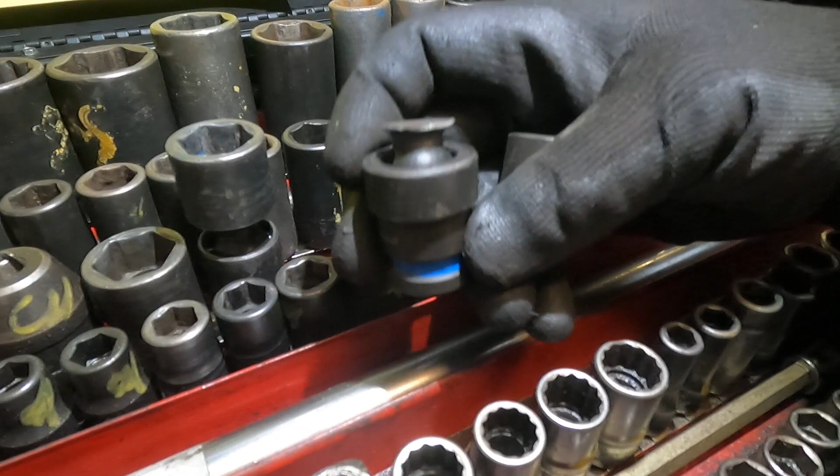This is one of those weeks where things have started to go wrong and you just have to muddle along. It's broke. Yeah, it's a cheap eBay swivel socket which was really thin, didn't realise, hasn't had very many working hours, and it's broken, and that was an eBay purchase. This one's a snap-on one, which I lost the other one, 80 quid compared to 20 quid. Big difference. It's just one of those things, isn't it? Well, we'll stick a welder on that and see how we get on with it. If not, we'll have to go back to snap-on.

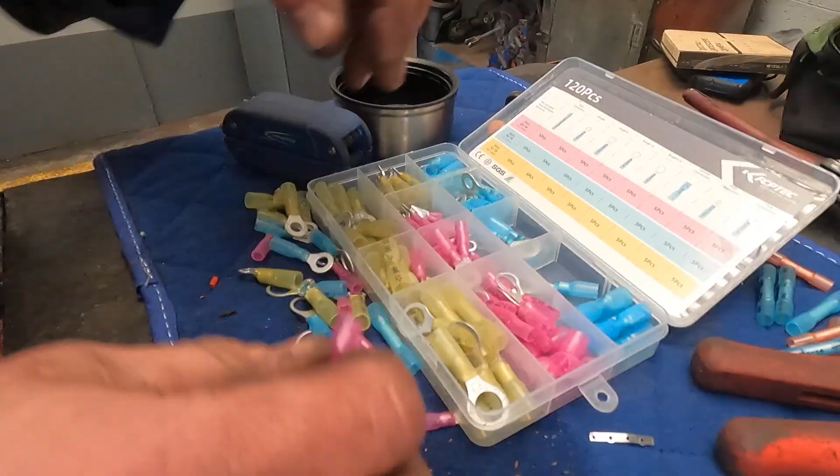Yeah, it didn't help too much, really. Things just didn't seem to work out. This blowtorch seems to just not work at the right time for doing heat shrinks. And talking of heat shrinks, you ever opened a box full of heat shrinks and they all fall out everywhere, and then you've got to find a way of packing them all back in? Yeah, that's just one of those days.

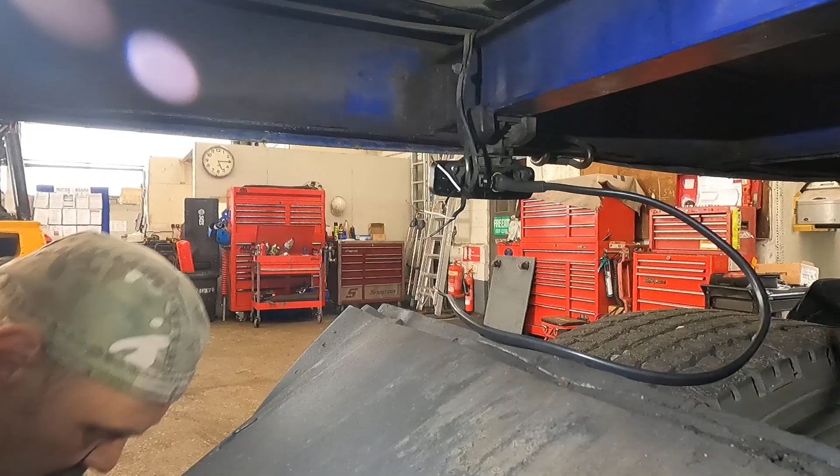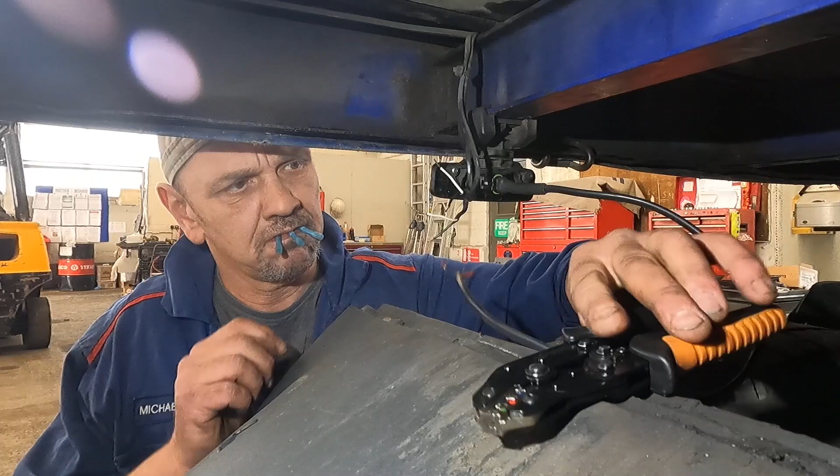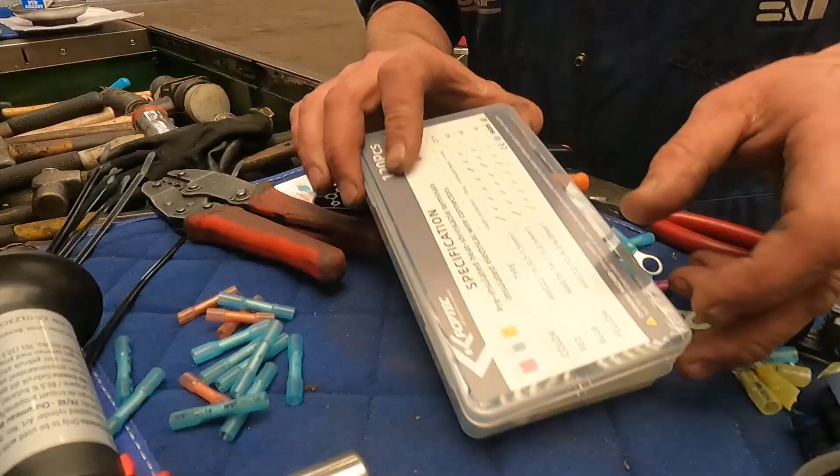And the AWG fittings that I've got here, pink, blue and yellow. Yeah, it's the usual stuff, but these ones are shrinky dinks, aren't they? And they do work if you heat them up properly and crimp them properly.

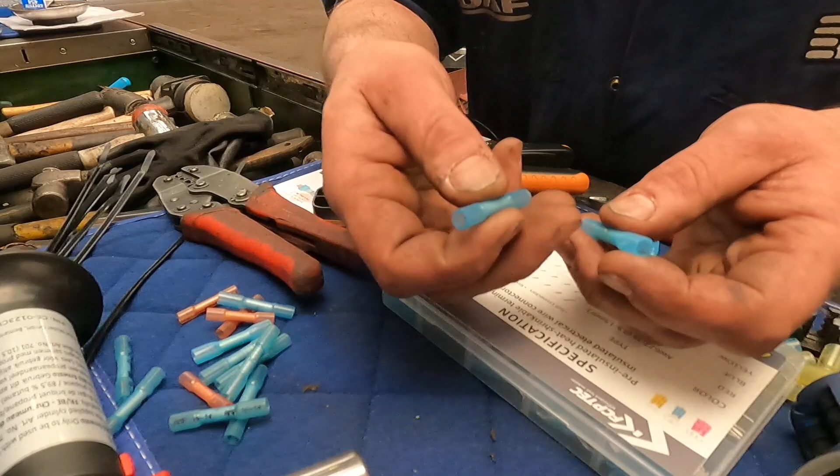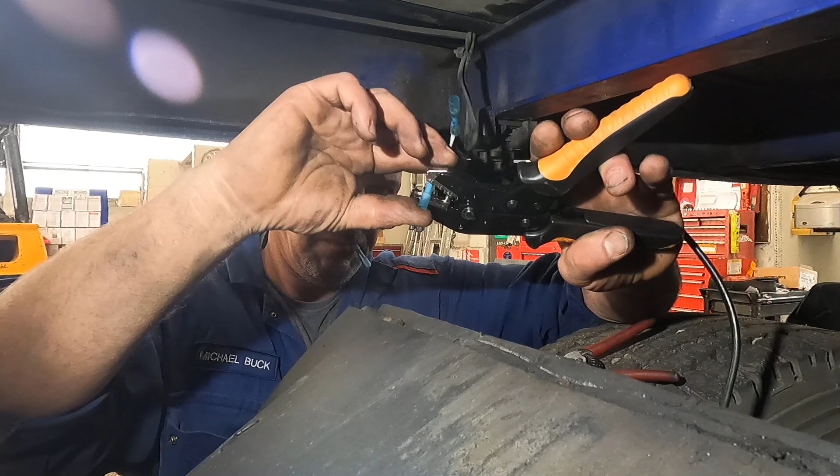So the crimper is also on the storefront, and I'm not going to tell you how good it is yet, but this is going to go in my breakdown box, and I will give you a review of it once I've done a few jobs, electrical jobs, because I can't show you the same thing all the time, as generally what I do is a lot of side marker wiring. But yeah, heat shrinks is the way to repair stuff, or to put stuff in line, or for connectors for batteries and all sorts of terminals. So basically this is the correct crimper for the terminals, whereas I've been using something different which wasn't quite right.

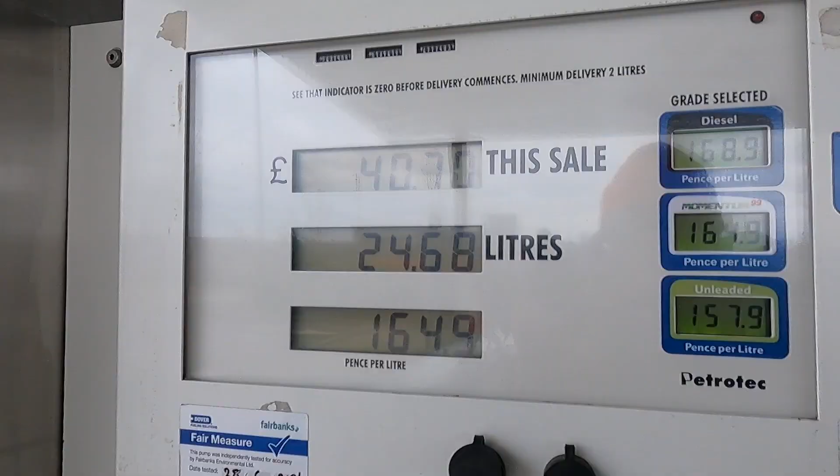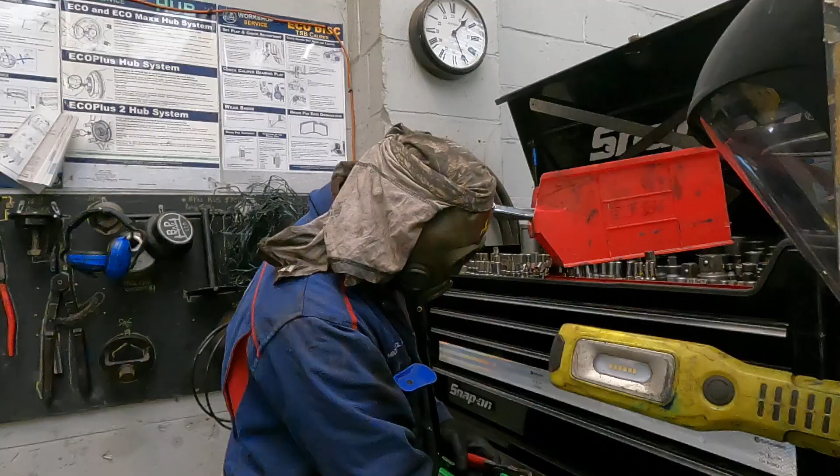Don't know about you guys, I don't know what you think about the fuel prices and the fuel shortages. Yeah, we are going through a crisis again, aren't we? And it's just ramping up. And look at this, sorry, no diesel, no unleaded. It's getting more and more common. Perhaps a guy could tell you all about that. He watches global affairs, he's clued in on what's happening.

But anyway, when he started with us, he looked at this tool and said, 'Oh, what is this? I don't understand this, it has a hook. Is this for a weapon? Maybe you can hurt somebody with this. I don't understand, it's weak, but it's interesting. What do you do with this? Ice pick, maybe? Yeah, I don't know. I'll put it back in the box.' That's what he said.

Yeah, well this is what it is. It's a seal puller. I'm sure some of you guys sussed it straight away, but if you can get underneath the seal in a hard place, which sometimes they're not, because this Isuzu D-Max seal is a little bit awkward and tough in there, that's what it's for - pulling seals.

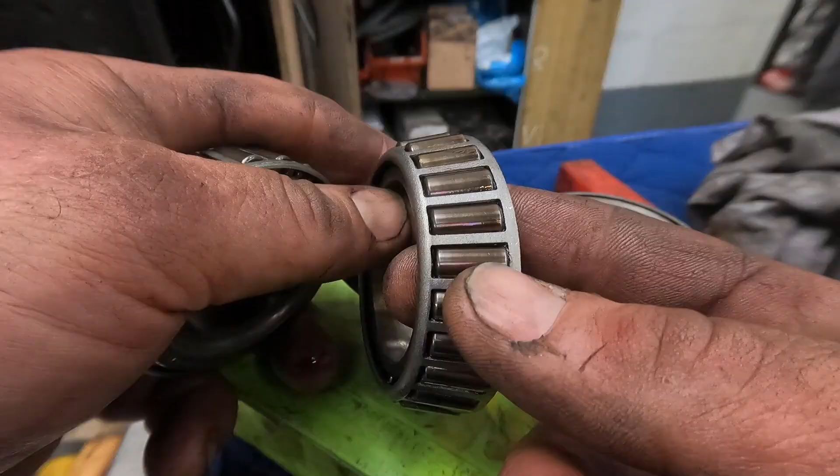Okay, and I don't often do this now. I used to on Land Rovers, and that's about it really. There aren't many vehicles actually where you get fully floating bearings, but that's just one of these things. That's a fully floating bearing, and these bearings have been overheated, as you can see by the bluing, the discolouring on the surface there. They've been a little bit too hot. Okay, they should look a little bit better, but that's just the way it is. It's about 80,000 miles, something like that, so they need a change. 4x4s are high maintenance. Yep, so you can see the discoloration there.

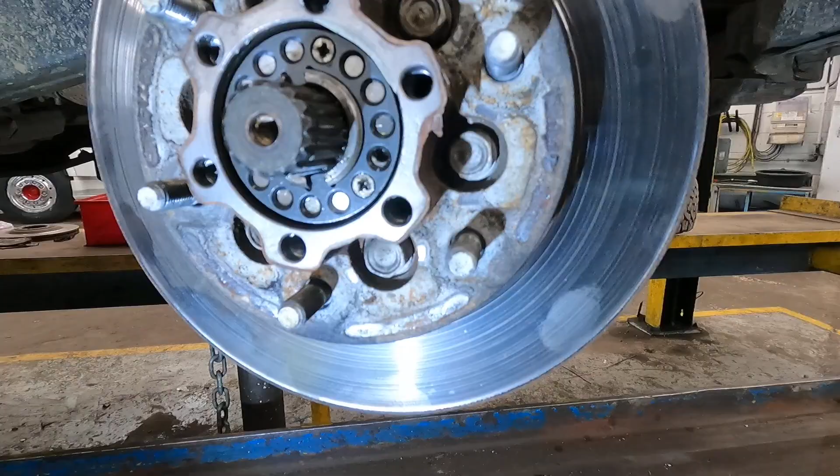That is not good. Now the Isuzu setup, this is interesting because it's 3 screws on there, and I had to do a disc change and wheel bearing change on the front of this. So yeah, this is quite interesting. And this was one drilling out the screws because they wouldn't come undone with a screwdriver, and when I put a screwdriver in, they just screwed up the thread.

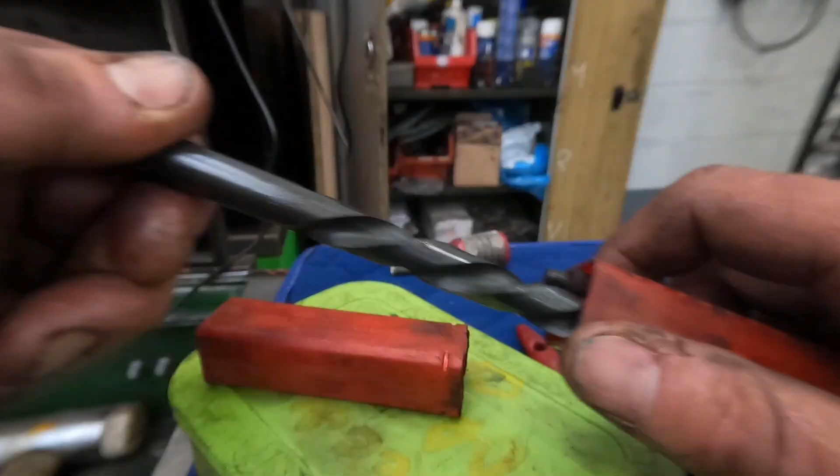Here we go, a left-hand drill bit which turns the way a screw undoes. You can see the action there - it takes the screws out. That's one way of getting them out. The other way is to chisel them out, which is a bit brutish, isn't it? But you can see all 3 screws out, no problem.

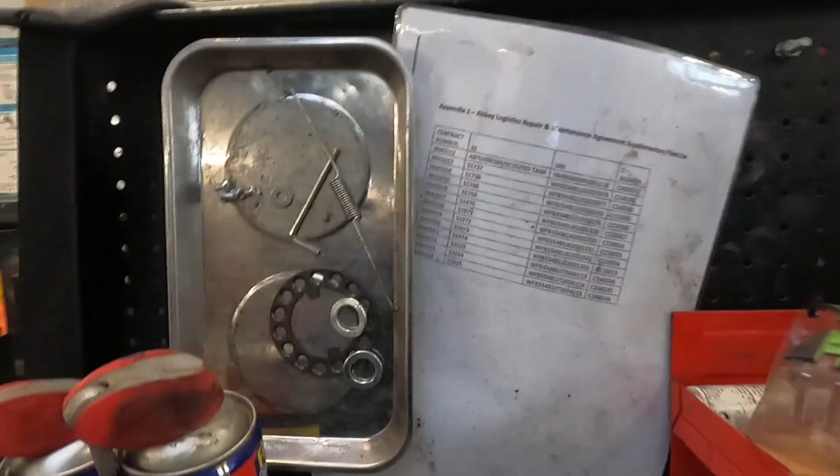You always have spares when you order your discs - get the screws and an extra locking plate as well.

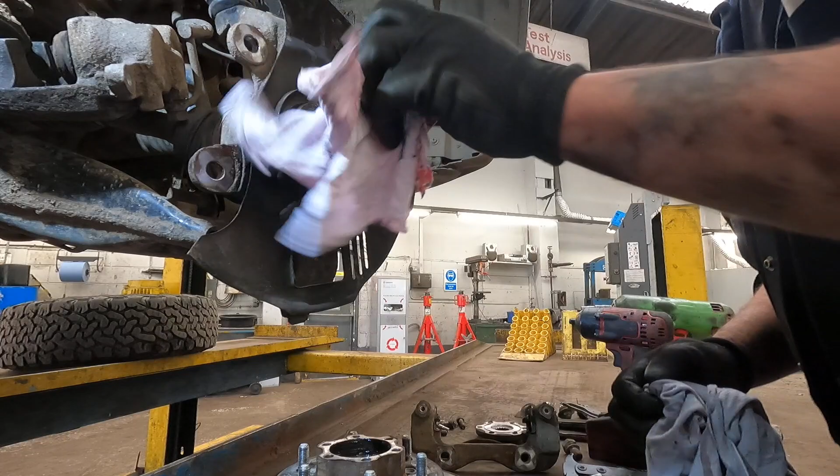The hub nut is a bit weird on these Isuzus. It's the first time I've actually stripped one down, believe it or not. Even though we've serviced a lot of these in the past, they never seem to go wrong. But apparently on the A service, you're supposed to take them out and re-grease the bearings, which is a job in itself because you've got to take the caliper off.

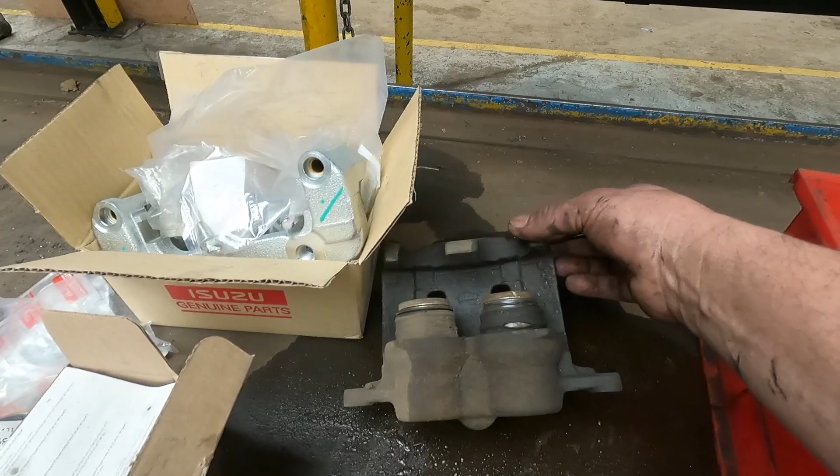It came in originally with a complaint of no brakes. Yeah, no wonder, no pad. The pistons came out completely, popped out and it was leaking. So that was recovered in.

What we've had to do is discs, a new caliper on one side, and I want to show you this tool that I've got here, which is a clamp. You like this, don't you?

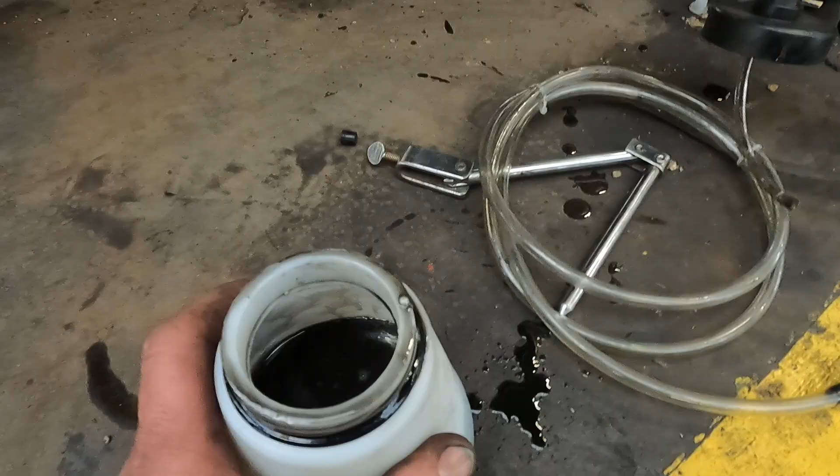It's a brake hose clamp. As you can see here, this is what it looks like for clamping off hoses, so you don't lose any more fluid when you're doing work on your brakes.

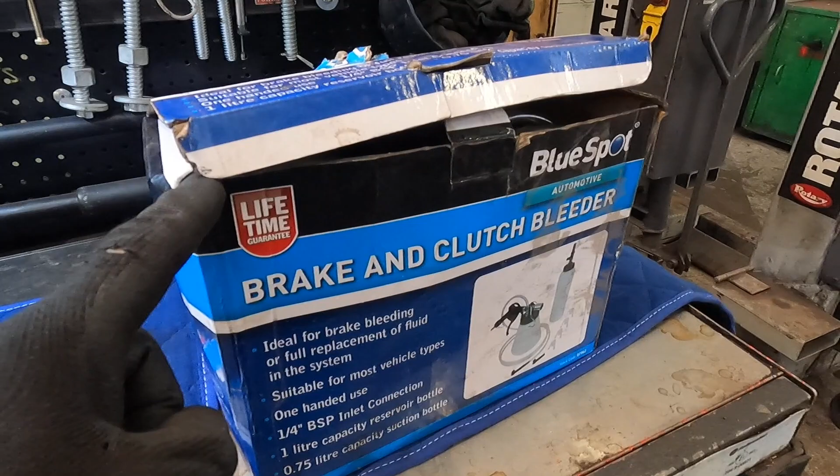But you need to bleed, so I have a brake and clutch bleeder, which is BlueSpot - our favourite tool company, which is cheap and cheerful. This is for bleeding brakes or even doing clutch systems.

You get instructions here, and there's not much to it, to be honest with you, but you do need an air supply, so it's a workshop piece of equipment.

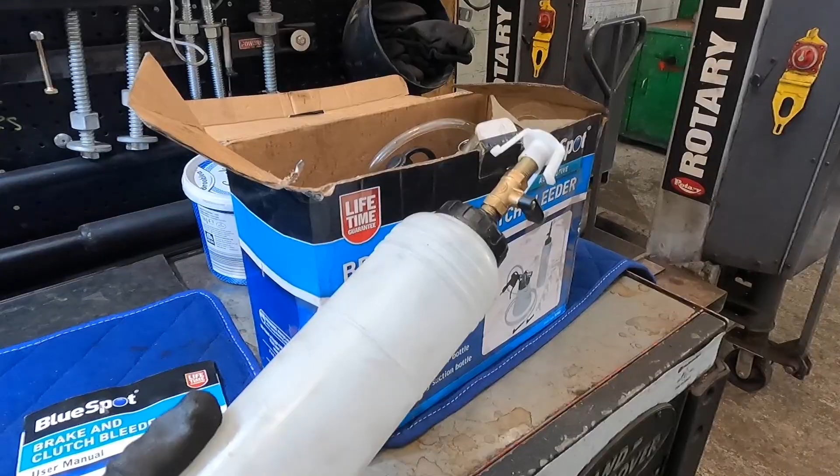This is a reservoir top-up, so instead of having to run around and top up the reservoir, unfortunately the Isuzu one's too wide, but there are adapters to have it stand up on your master cylinder. We'll have to resort to the old way of keep running back to it and topping it up. This is unusual actually, because the neck on an Isuzu is a lot wider than most vehicles.

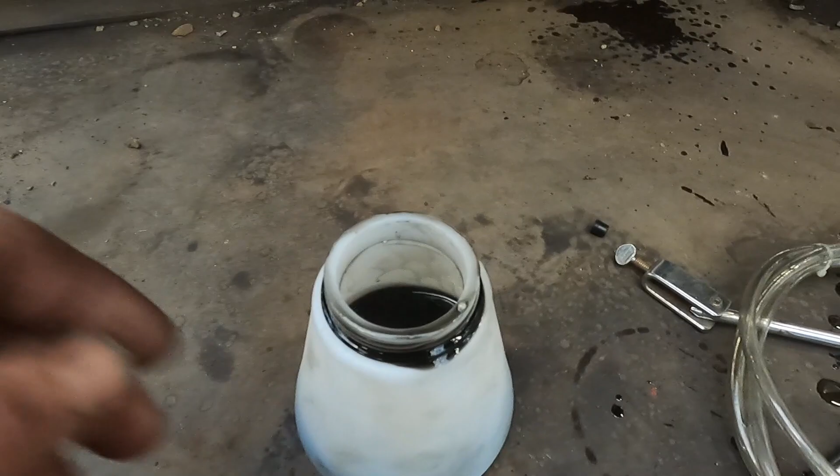You want to be bleeding brakes every 2 years or so. You don't want to get them to that colour - when the fluid's that colour, there's corrosion in the system, isn't there?

Basically you fit an adapter onto the nipple, crack it off, crack it off - get it? You crack off the nipple.

Then you just pull the trigger once it's connected to an airline, and what happens is it's literally a bit like a spray gun really. It just has a gentle vacuum which will bleed the brakes up, but that will pull the fluid through the system. It does take time.

It's not one of those super duper 'let's do it in 2 seconds' tools. This does take time, and you see it's not a full flow here, which first when I used it I thought wasn't right, but it is right actually.

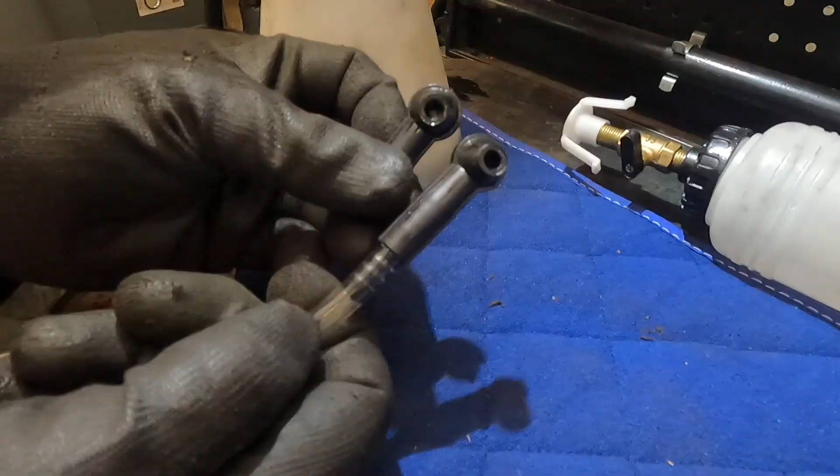The adapters you get here, you get 2 different types - you get the right one for your bleed nipple, and as that's pulling it through, this has been used quite a lot actually. We've been running it in the workshop and found it's really good.

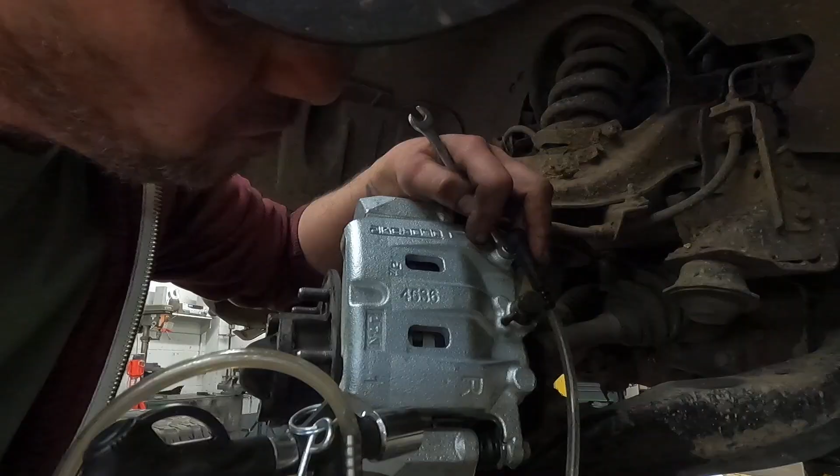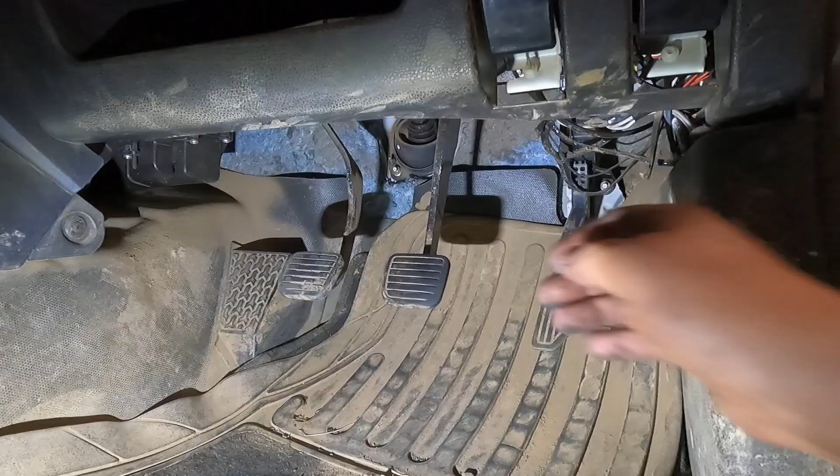So it is basically simple. I've given it a good road test and I'll say yeah, this works quite well, simply because I can get a pedal - that had no pedal when it came in. It does have a solid pedal now, so I've bled up the fronts.

That works, and of course to get the level on the reservoir right, you can also use it that way. So it is for workshop use really.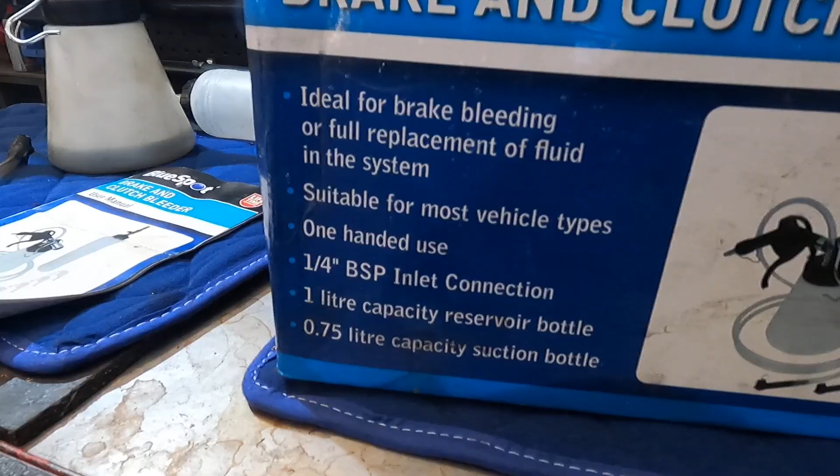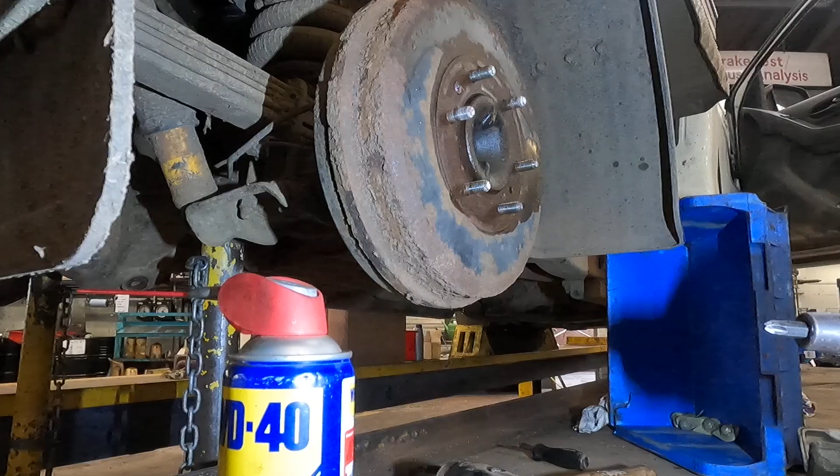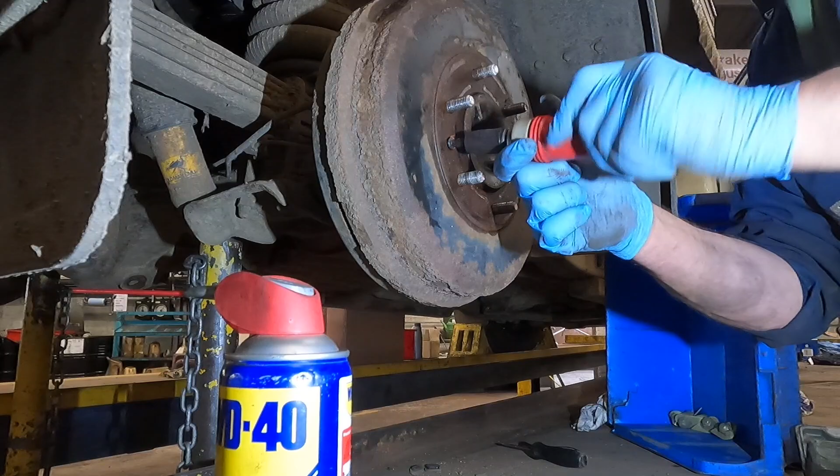Now, rear brakes - had to take the drums off, change the shoes, screws. They never come undone unless you use something like an impact driver. You whack it, it turns just a little bit, it jars the screw threads to come undone. So this is a story within itself - brake drums, removing those.

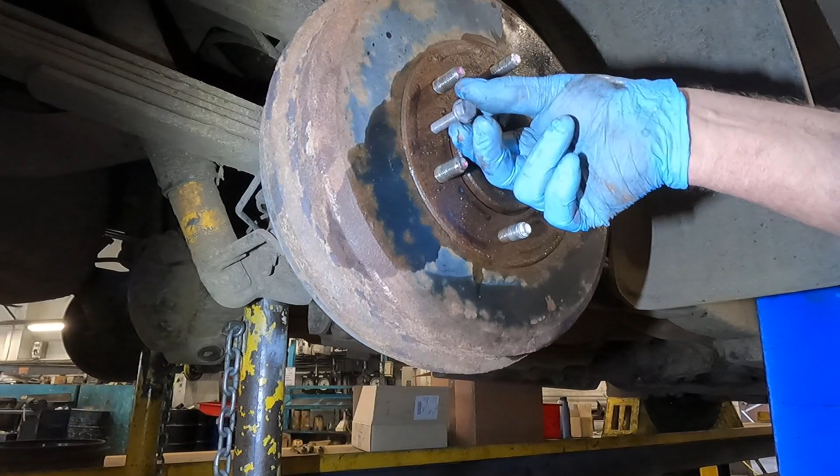Now, HGVs, the drums have a threaded hole on both sides, so what you can do is put a bolt or two bolts in and then wind them out. This will pull the drum off the hub, but this one had a hole - didn't know what the thread was.

Turned out it wasn't a thread at all, there was no thread in there. So what I have to do is resort to a bit of banging, and you can see the amount of dust coming off this.

Well, this was only half the story. Now, remember I did a review on the Teslong - this has turned into a station bike, this endoscope. Yep, Teslong endoscope, which is absolutely brilliant for sticking in places to see things.

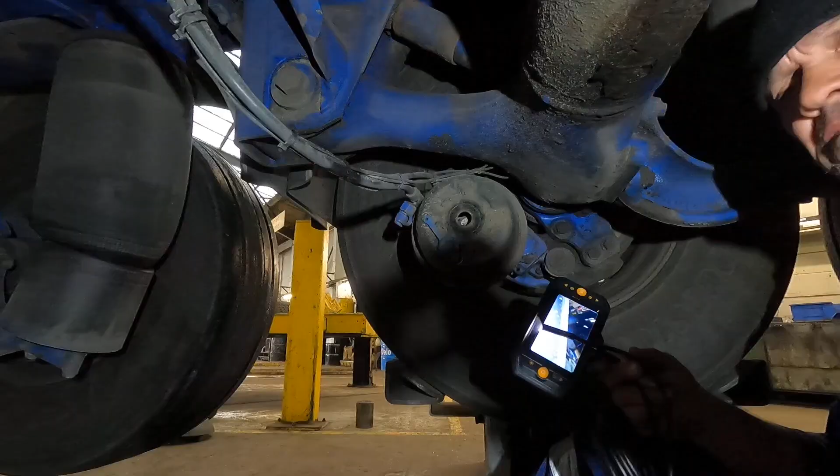Now Teslong have asked me to review a new one. Pete delivered this from Van 73 very, very quickly. I will do a review on this, but it's not actually a borescope, it's a broescope - like bro science, bro. It's a broescope camera. Actually, it's a mini one, which is all-inclusive - there isn't a detachable lead on this.

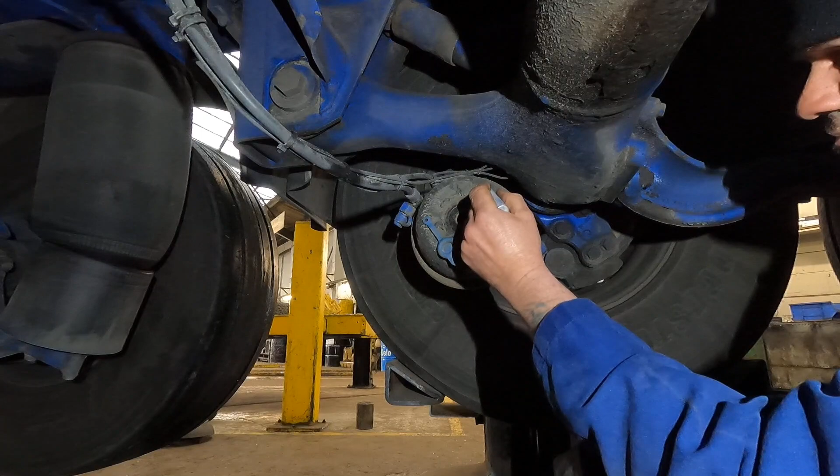As you know, I do brake chamber checks because it's a pain in the backside when we do a loaded brake test for MOT before we send it to test. So I look for broken springs - lots of uses with an endoscope. It has become a vital piece of equipment, and as I said, the station bike means it's something everybody uses. So yeah, that's a failed brake chamber. Done that pre-MOT inspection, and this means I don't have to change them on the lane.

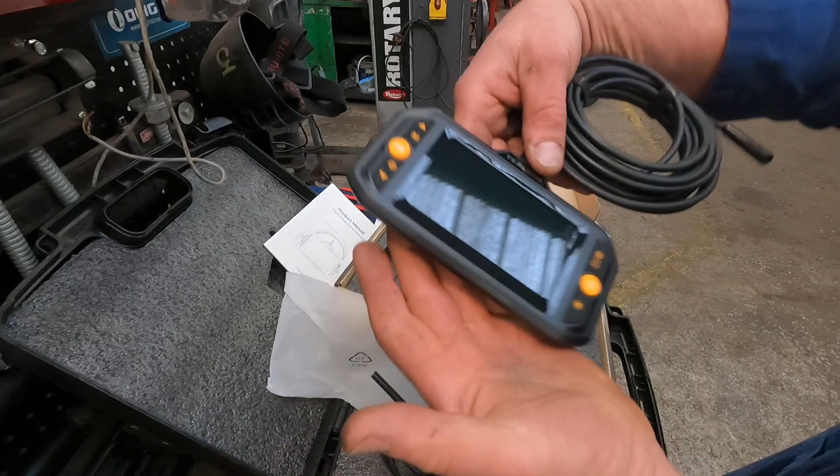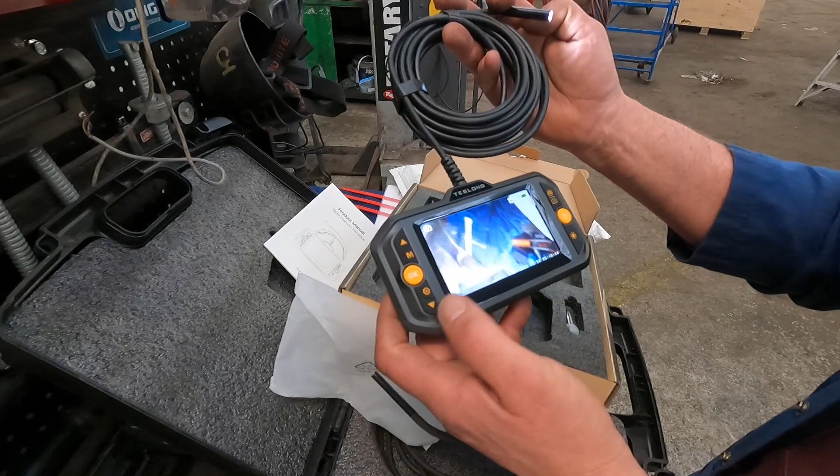Okay, so yeah, done, finished. I will do a review. This is nice. As you know, we don't read the instructions - what we do is just mess around with them, press the buttons and see how they go. So I'll show you the uses of this later. This is a nice bit of equipment. I've recently had a lot of kit sent to me, a lot of emails - don't know why, I think it's just one of those seasonal things. So it's not bad at all.

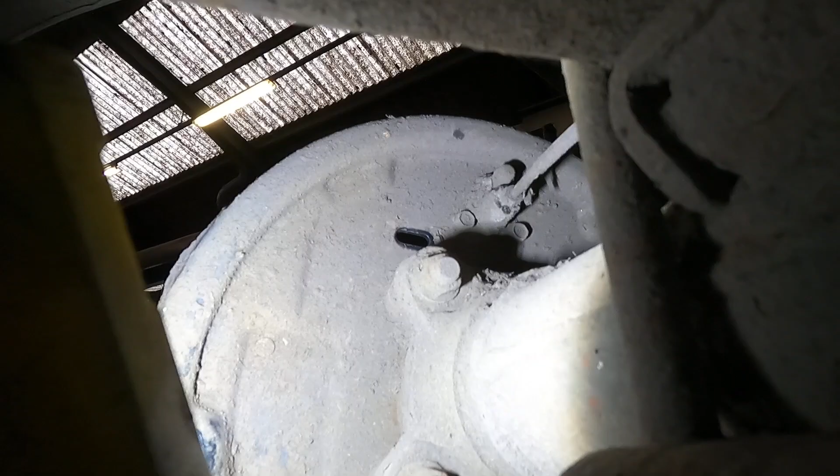So getting back to the story of the Isuzu, there is an inspection plate just up here, and behind there is an adjuster wheel to wind the brakes off, and I needed to find it, so here we go. Just a quick look in there, and I'll show you the wheel teeth, so I can now wind the brakes off. And when I did, I could literally get the drum off.

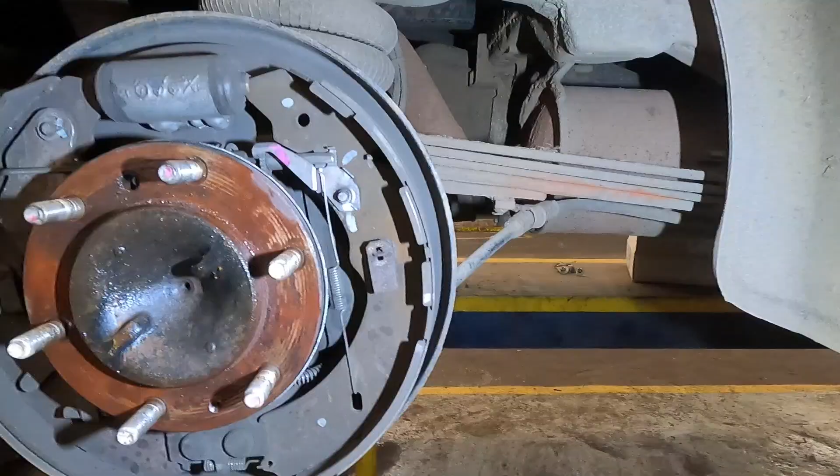And yeah, you're going to tell me, yes, you do need to wind brake drums off, or the shoes off, before you take the drums off, because there's usually a lip which you can't get past the shoes. Brake shoes are almost metal. Don't like this type of system because there's lots of springs and things, but you can see the adjuster wheel in there - a little bit more complicated than HGV brake drums.

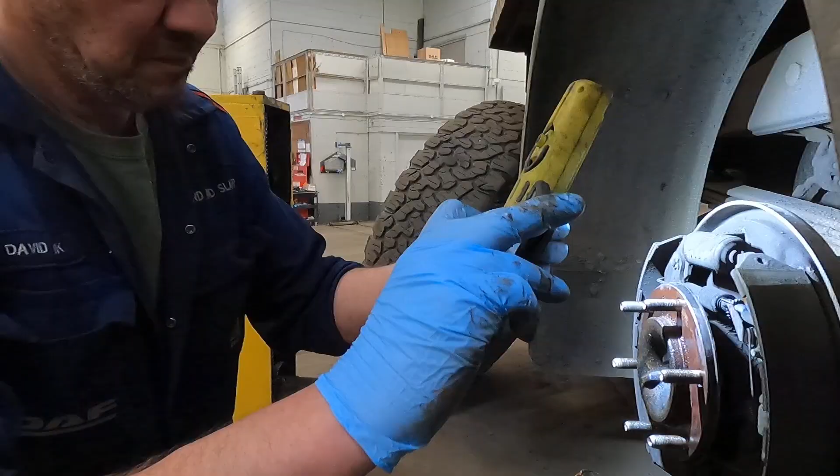So what I do is use a mobile phone, not only for taking pictures of part numbers, but also when I'm going to disassemble something, so I know which way it goes back again. Always refer back to a picture. Mobile phone, vital bit of kit in the workshop or at home.

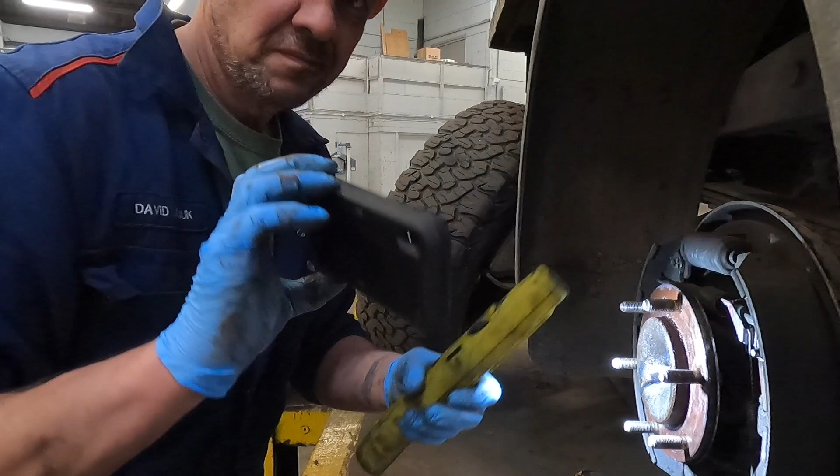So there we go, that's a full bleed up. It's had wheel cylinders, brakes all round, new drums and discs and everything, and that tool works really, really well - nice, solid pedal. But that wasn't the end of the story. When I got it for a test drive, something else happened.

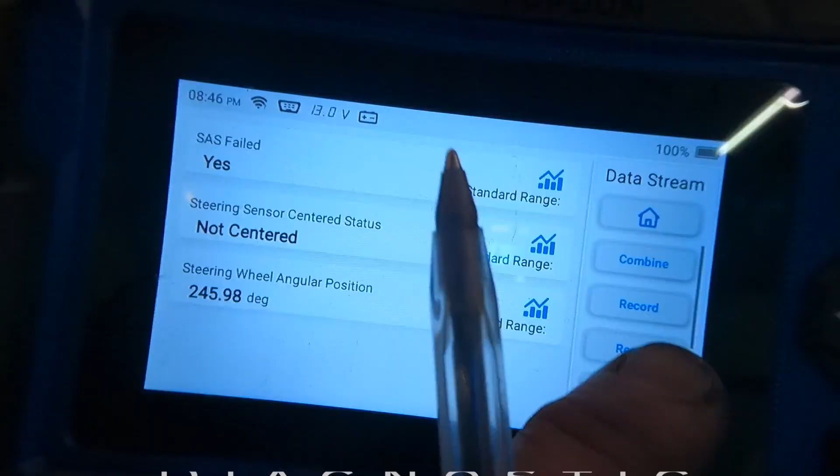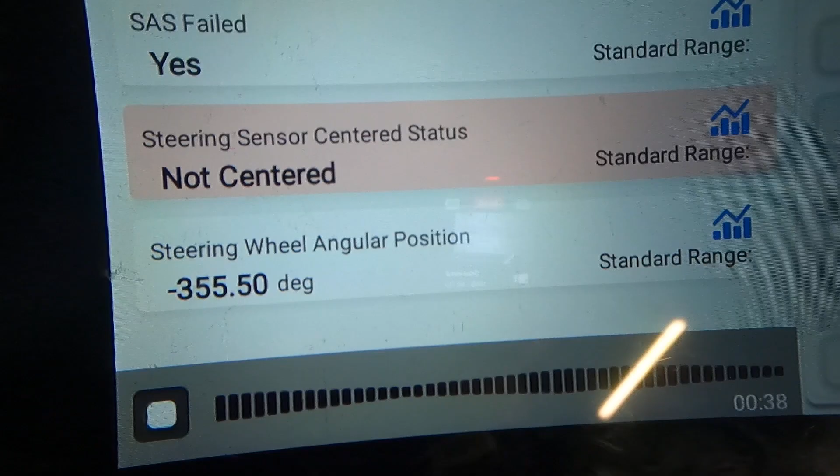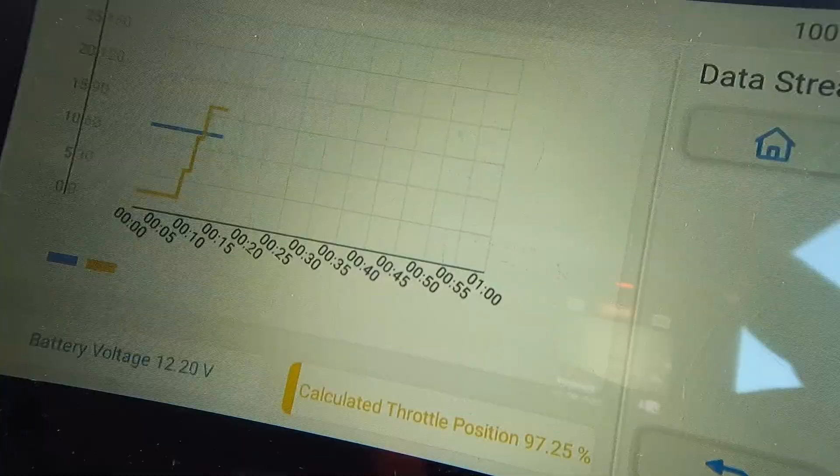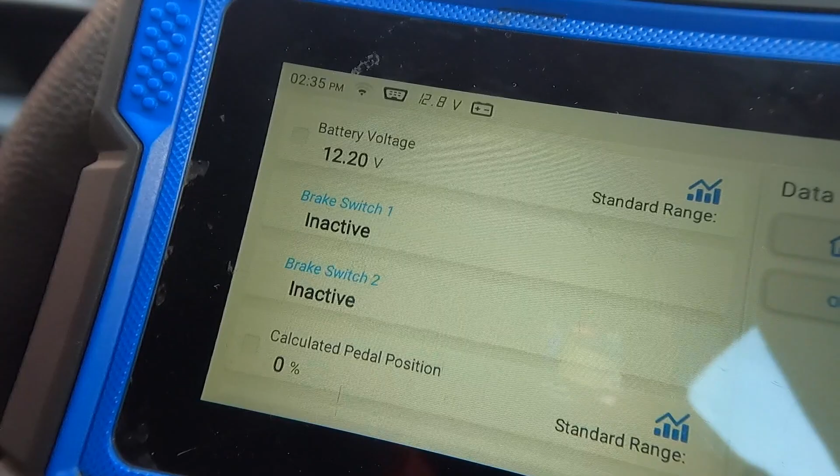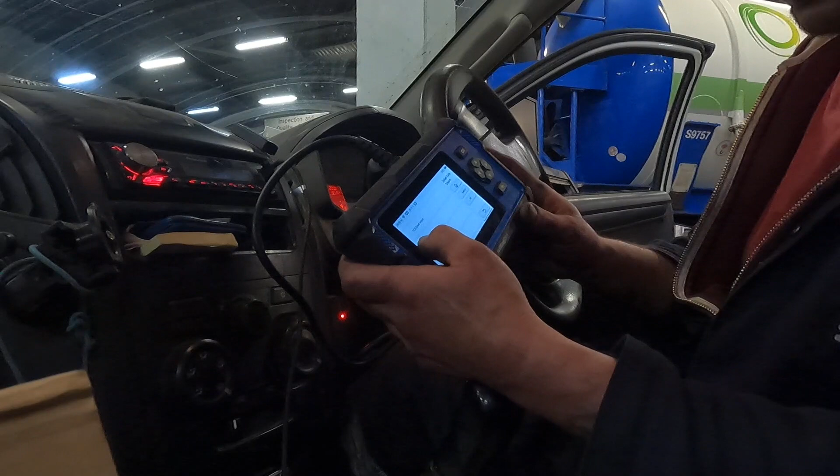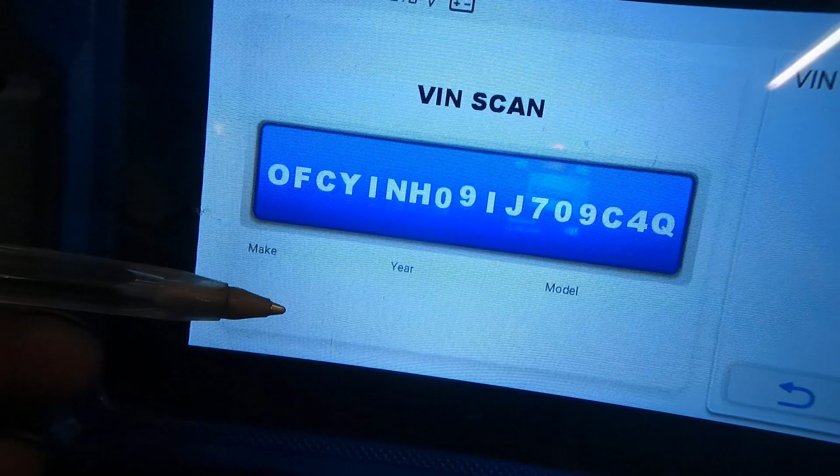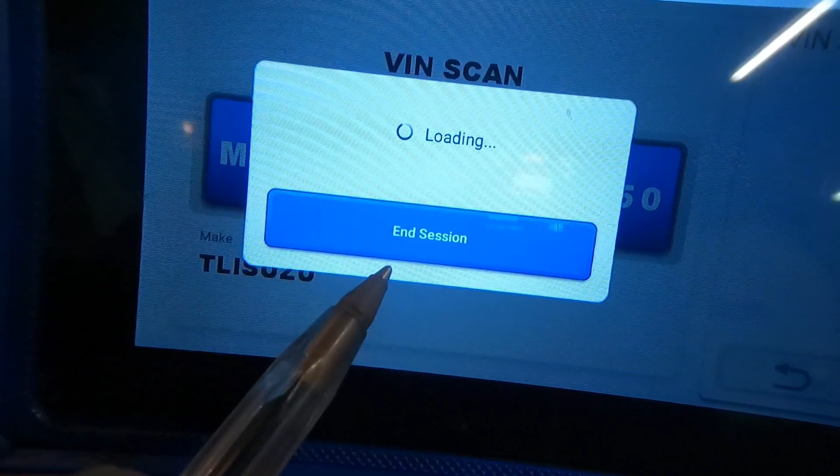Okay, so TL Isuzu, this is strange - we don't have a Wi-Fi connection, but it did dig out the right Isuzu by automatic scan. We're running a VIN scan first, and at the bottom it will come up with the make eventually. It told me exactly what it is, TLI or TL Isuzu. Once I got into that, I could get the right connections for the ECUs. We're letting the system load up first, then going for an automatic search.

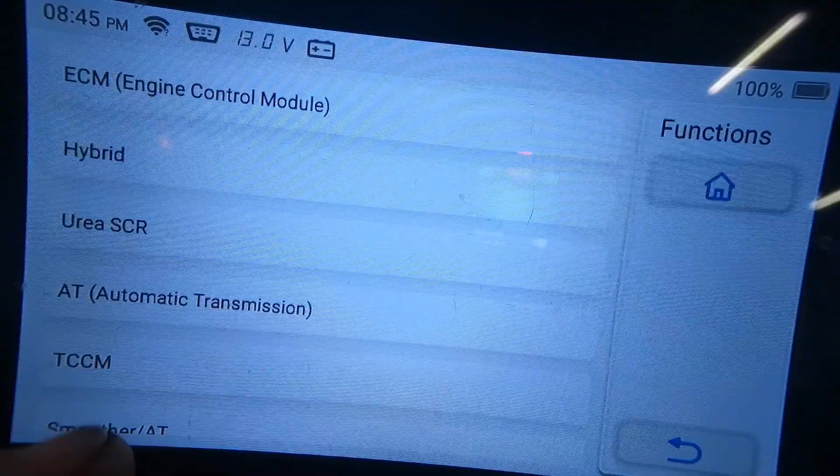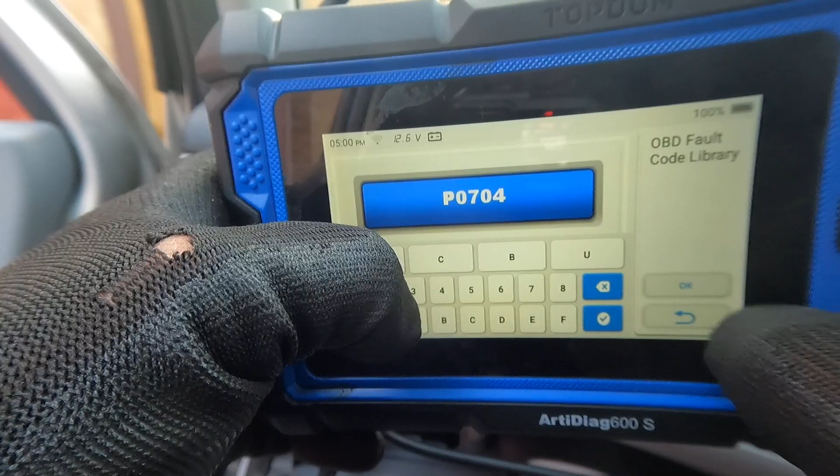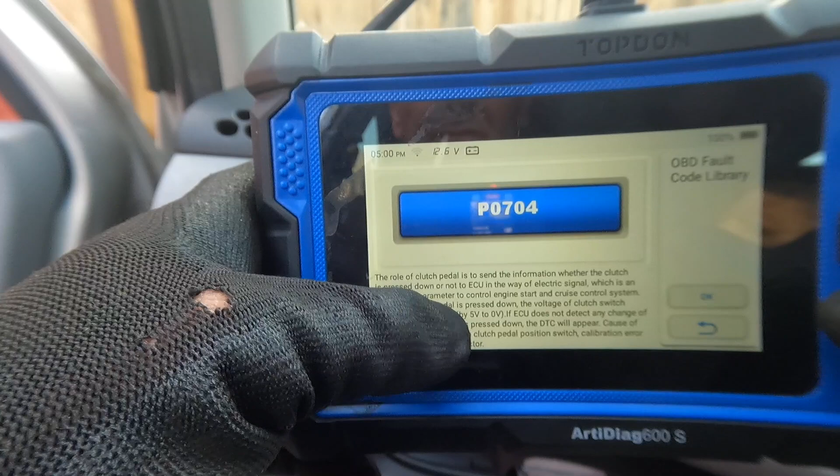Now it's a long number. I told you about the P codes and U codes in the review that you can type in and it will give you a description. However, on this one it wouldn't do it because the number was too long - it's vehicle manufacturer specific, or ABS specific. But you can click on that button there, and if you have Wi-Fi, it will connect to a database.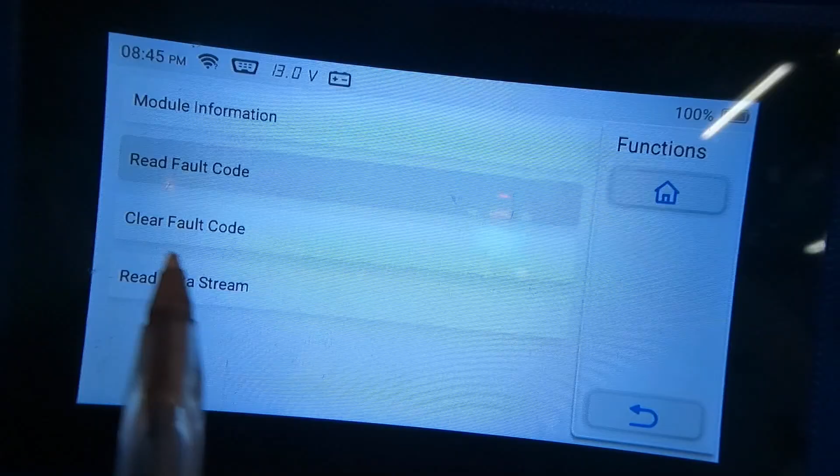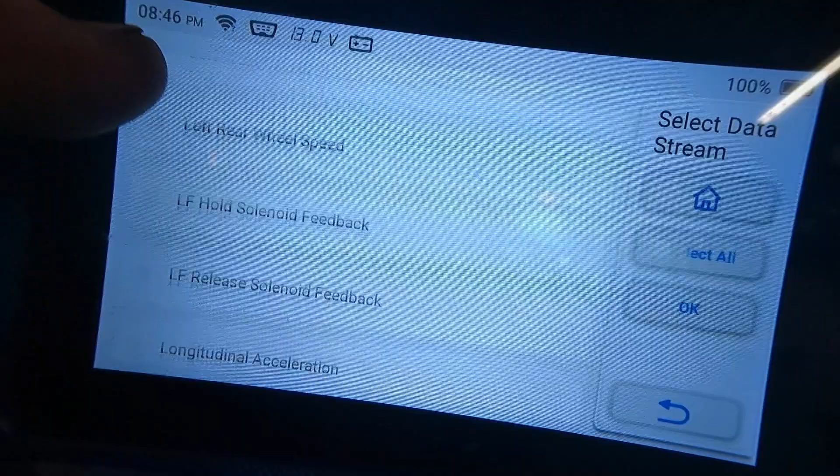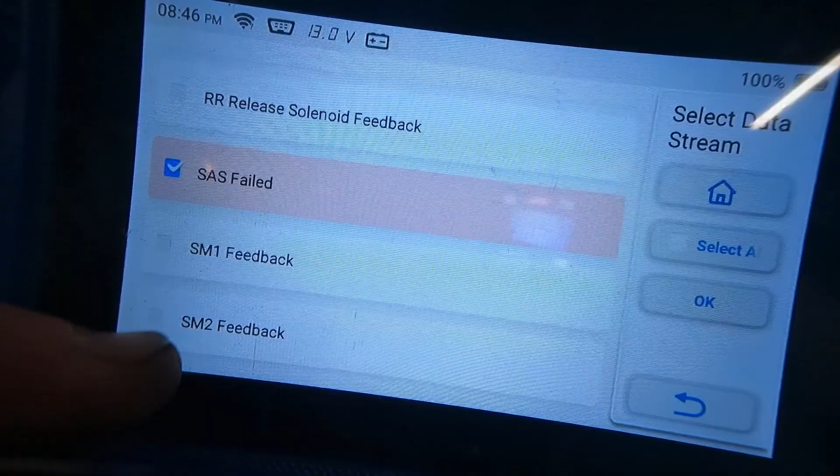Okay, so what we're going to do is go for read data stream. There's a lot of information in here, which means the ECU on the ABS side is actually quite complicated. We have a lot of information we can look at, but what I need to do is look for the steering angle sensor - SAS failed, that was notification that it's failed. We know that. Steering sensor centered status, steering wheel angular position, those are the three we want to look at.

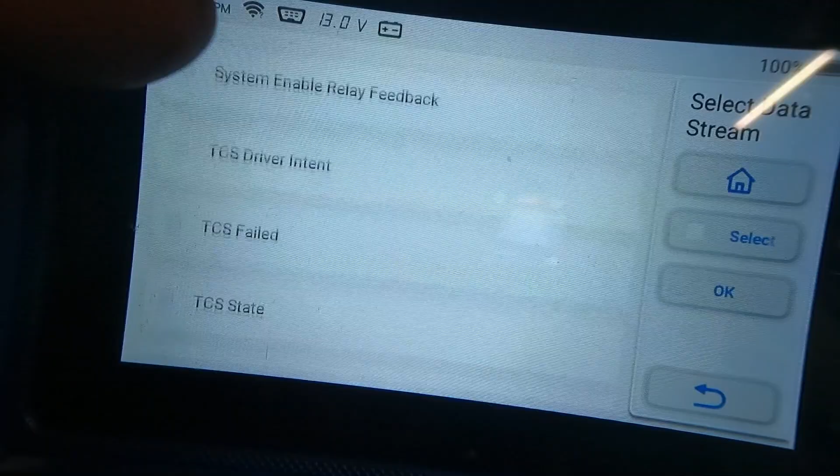Now, I'm running and gunning this one, so sorry about the shaky screen here, I'll try and improve this. But basically what I needed to do is find out what the angle sensor was doing, and I've got the graphing system up here, turning the wheel from left to right, lock to lock, and seeing how it was behaving and what it was registering at. This was quite an interesting find.

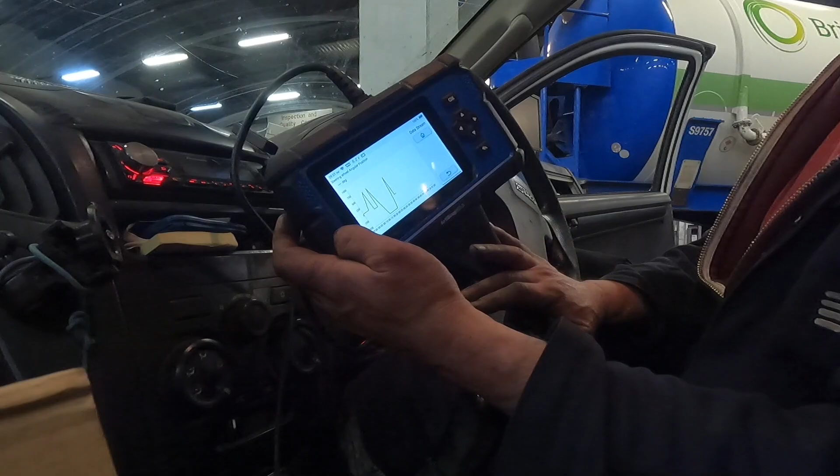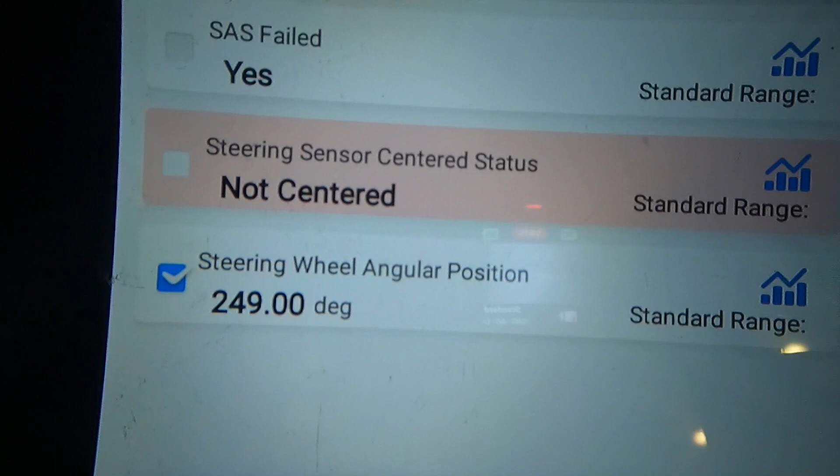I don't know why this had happened, because when it came in with a brake fault, there was no information about warning lamps on the dashboard. So the steering sensor stated is not centered, and it has failed. So I'll take those two off the graph and look at this one, and we'll analyze that now.

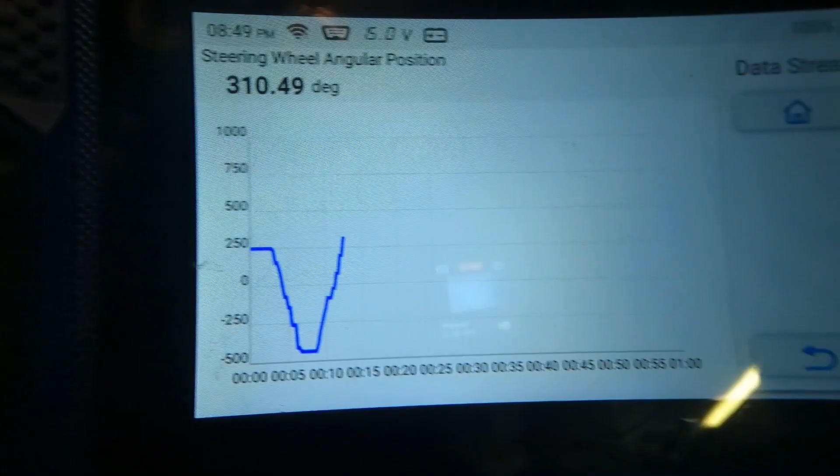Okay, so we have the graph here. This is center position. You turn it all the way one way and it will go to 436 degrees, full lock, then we go back to center, go past center, and then back out, and it drops out to 0 because it can't read it. There you go, it can't read it on the numerical side, flatlined on lock. Once you start winding it the other way, you can see the numbers were over 600, go back to 0 and then down again. Okay, so that's lock to lock.

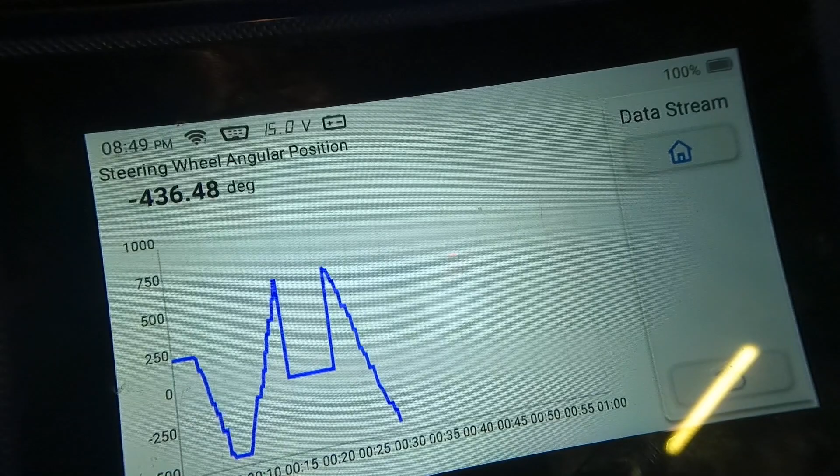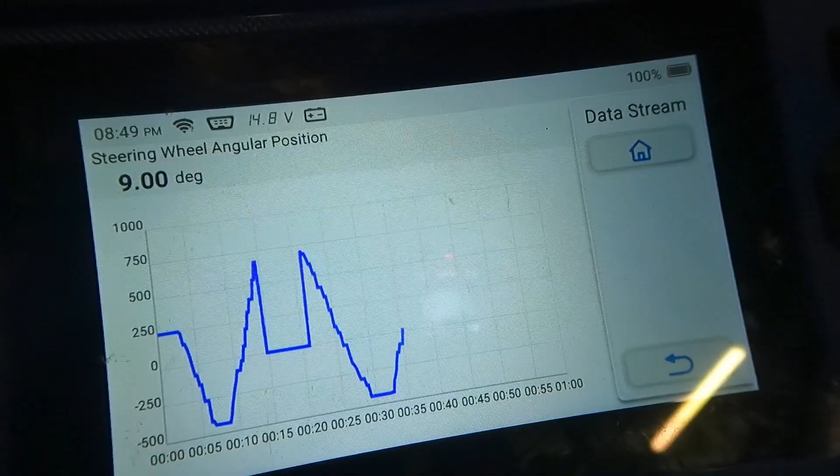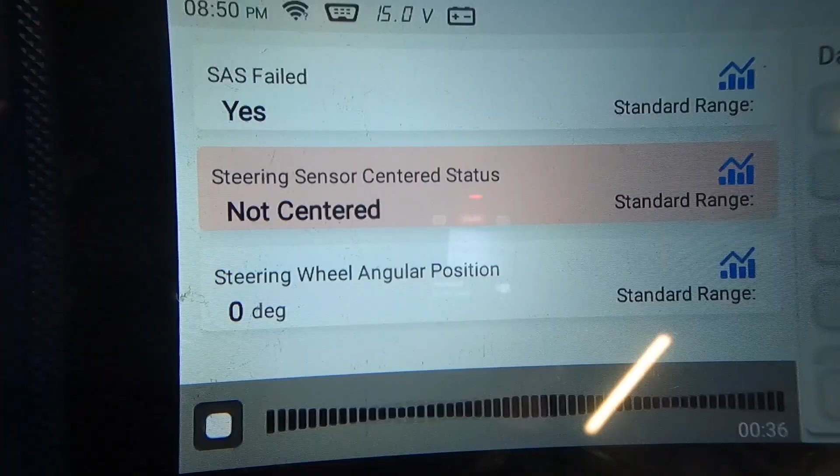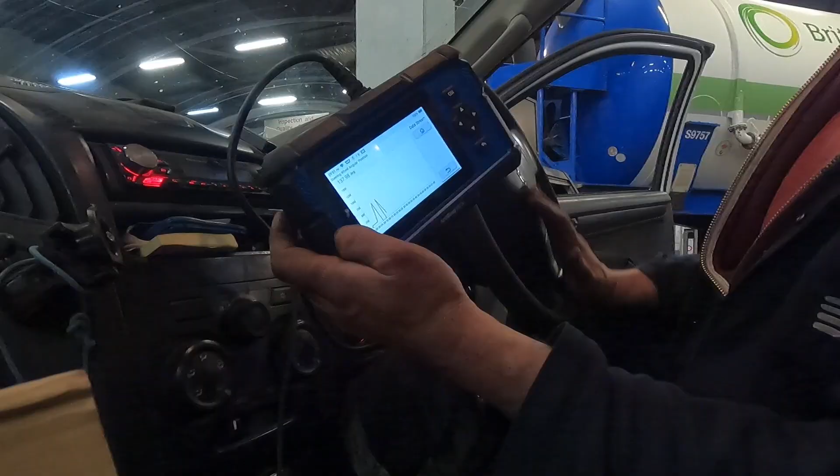So one side is reading fine, minus 436 degrees on lock, and then back the other way. When we take it to 0 and past 0 again, you can see this, it goes up and then boom, it's gone off the scale. So what I'm trying to do now is center it and find out where it says 0 on the machine. That steering wheel sensor angular position is 0, and look where the wheel is - in comparison to where the steering wheel actually is, that is why it is out. Yep, so it's not registering right. This is a bit of a handy tool to tell you what's going on.

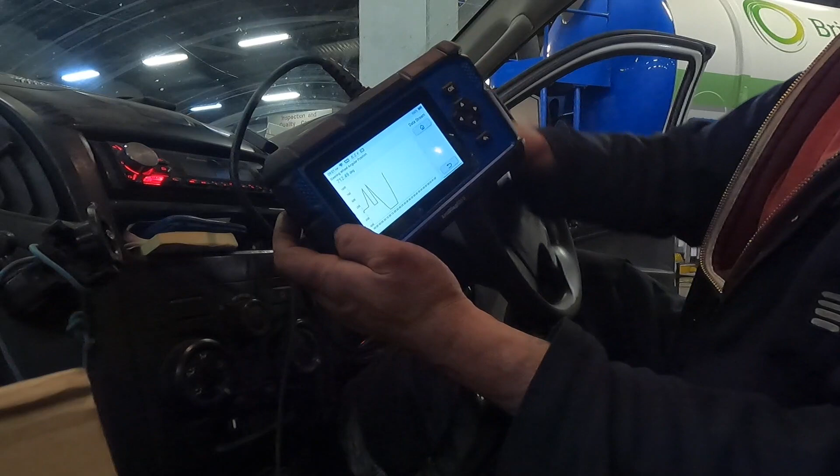So what do you do about it? You can either reset it or replace the component if it's failed, but the component is actually reading, it's just not reading correctly. So what do you do? You do a reset, which the machine can do.

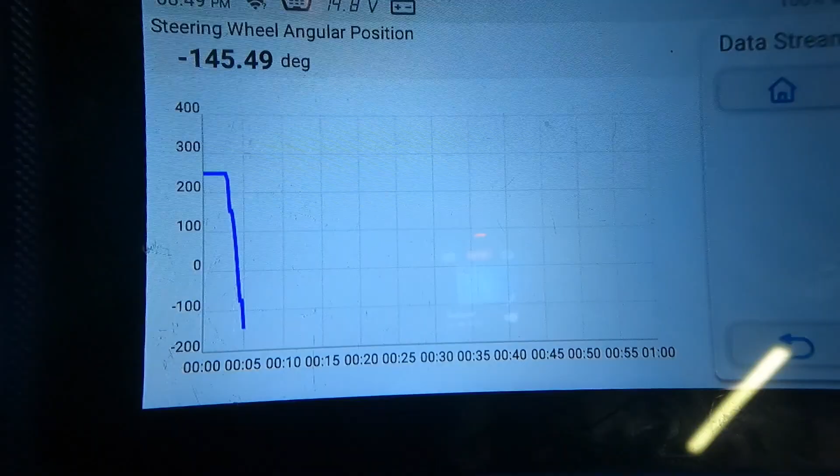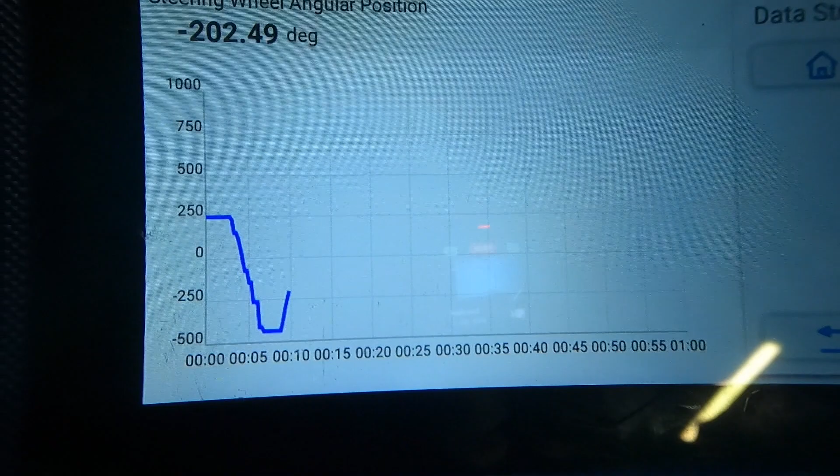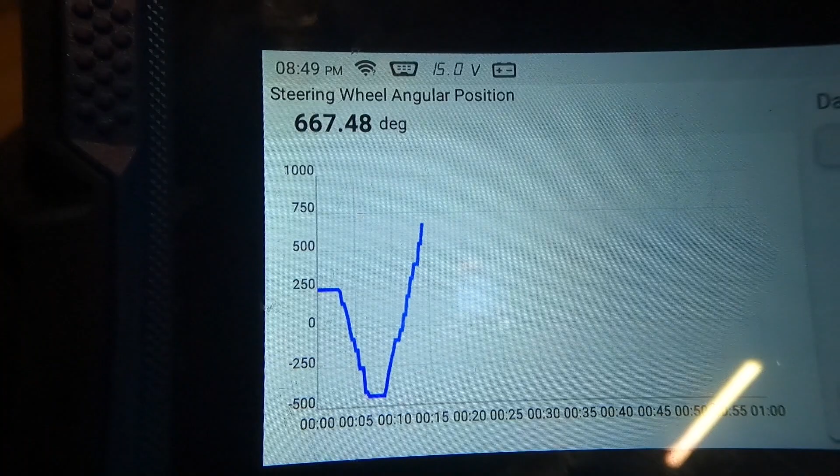So looking again a little bit slower, you've got numerical and graphic - if you understand graphs, then all the better. So what we've done is go from one lock, held it on the lock, you can see there it's 400 odd, and then turned it back the other way. You can see where it started from 250 and not 0, and then it's climbed up. The angle is going up to 600 odd, and then it bottoms out and can't get a reading. So that is actually wrong, but the sensor works.